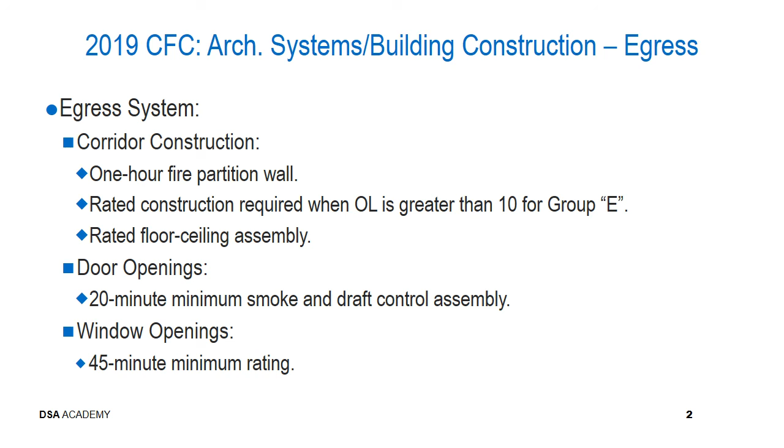Door swing must be appropriate. Doors must swing in the direction of egress travel when serving rooms or areas with an occupant load of 50 or more persons, or a Group H occupancy. For door clearance, the undercut of the door cannot exceed 3/4 of an inch max. This 3/4 inch may be referenced in NFPA Standard 80, Section 4.8.4.1.

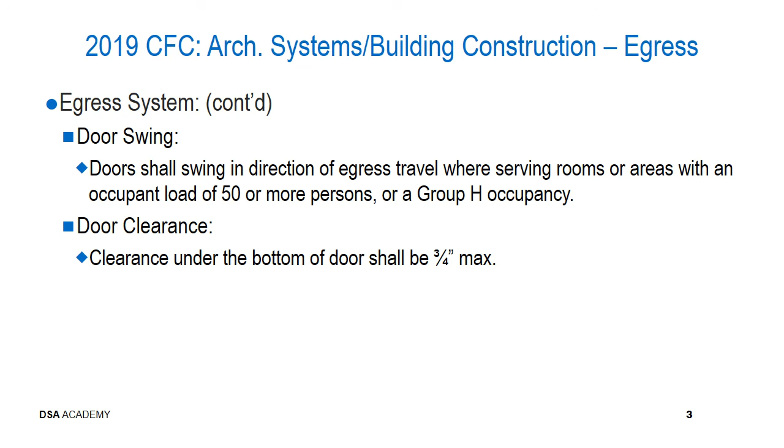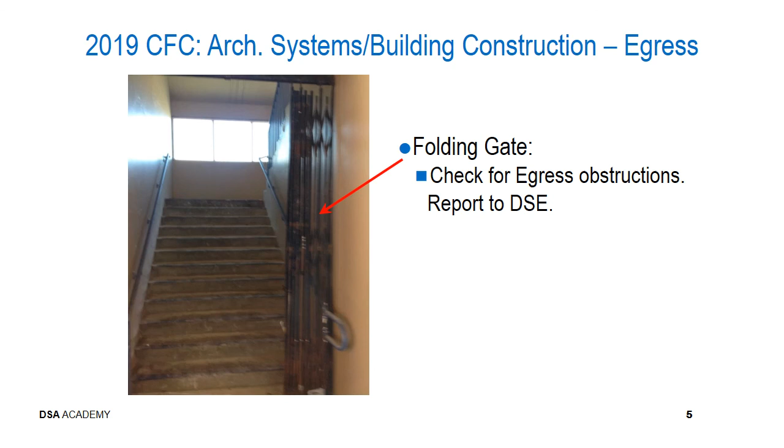2019 CBC Section 1008.2.3 pertains to exit discharge lighting. Exit discharge lighting is required from each building exit along the route to the public way or to a safe dispersal area. The egress lighting must provide a minimum illumination level of 1-foot candle at the walking surface. This section is new to the Model Code 2018 IBC.

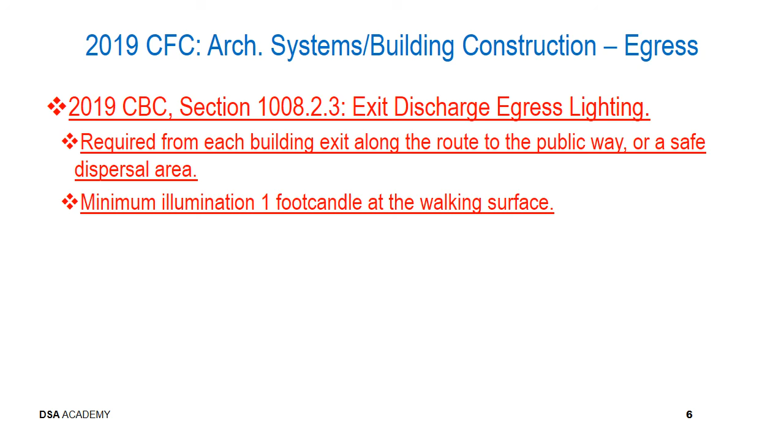2019 CBC Section 1010.1.1 for clear width directs that door openings must provide a clear width of 32 inches minimum. Clear openings of doorways with swinging doors shall be measured between the face of the door and the stop, with the door open 90 degrees. Openings greater than 24 inches deep shall provide a clear opening of 36 inches.

There shall be no projections into the required clear opening width lower than 34 inches above the finished floor or ground. Projections into the clear opening width between 34 inches and 80 inches above finished floor or ground shall not exceed 4 inches. It is important to note that there are door provisions in the 2019 CBC, Chapter 11B, that are applicable in addition to those in Chapter 10.

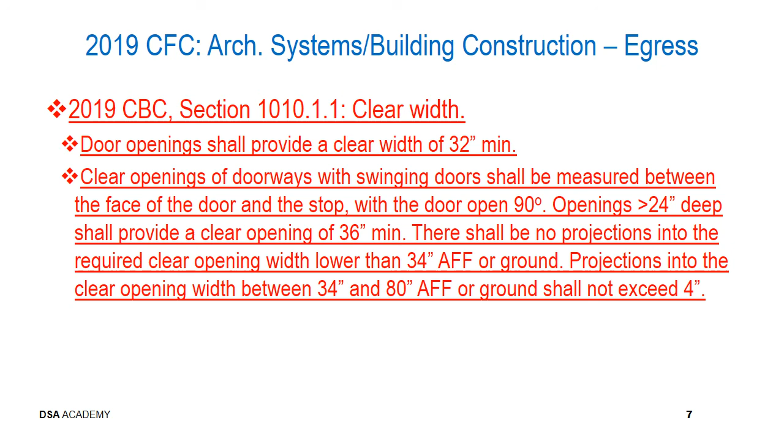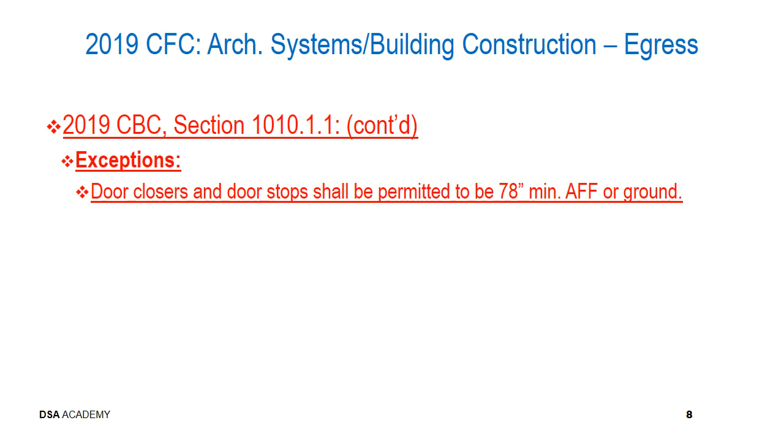2019 CBC Section 1010.1.1 does contain an exception. This exception for door closers and door stops states that they are permitted to be 78 inches minimum above the finished floor or ground. This exception allows a door closer to be installed in the doorway without jeopardizing the minimum clear height requirement. Here's a detail for door swing, height of hardware, and clearance locations.

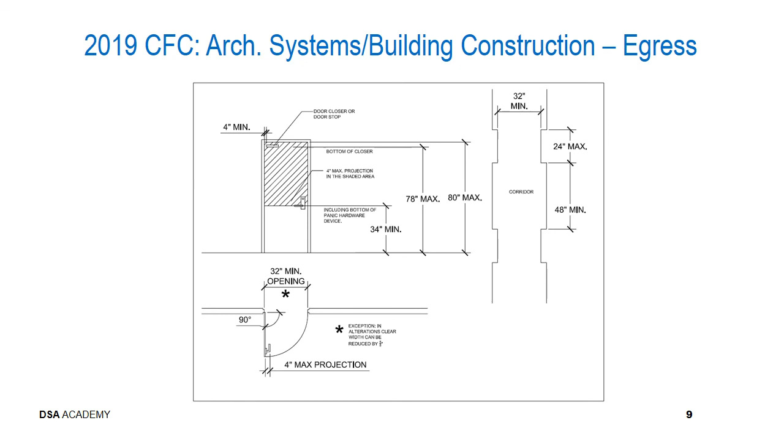Continuing on with exits, the project inspector is going to be verifying exits from the building to the public way or safe dispersal area, from the rooms, ensuring that a minimum of 2 exits are provided for those rooms serving an occupant load of 50 or more, and that the exit signage has been provided within the building and from the building. Verify the listed spacing of the signage. The building code requires a maximum 100-foot spacing.

However, it is important to check the listing material for the exit sign, as some manufacturers specify dimensions less than 100 feet. And we're looking for the exit signage in the rooms. Remember, above the exit doors, where the path of travel is obscured, and other locations. Exits must be clearly identified at all times.